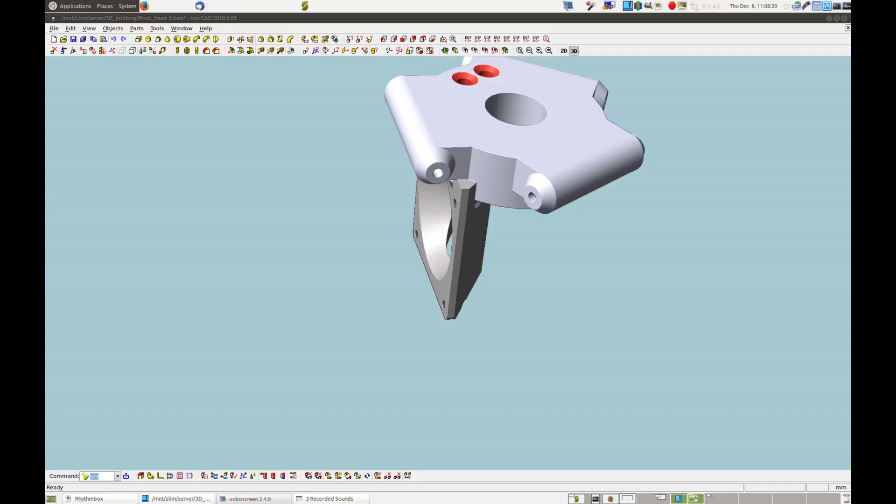Okay, well this I think will be my absolute final design. I've already got an ABS mock-up of this in the machine working currently, and the results are actually quite fantastic.

But I noticed a few little improvements I could make. Initially I had this fan area a little bit too big, and now I've got it what I think should be quite perfect. And I didn't have anywhere to tie off the wiring, so I've added these two holes here to pop a cable tie through.

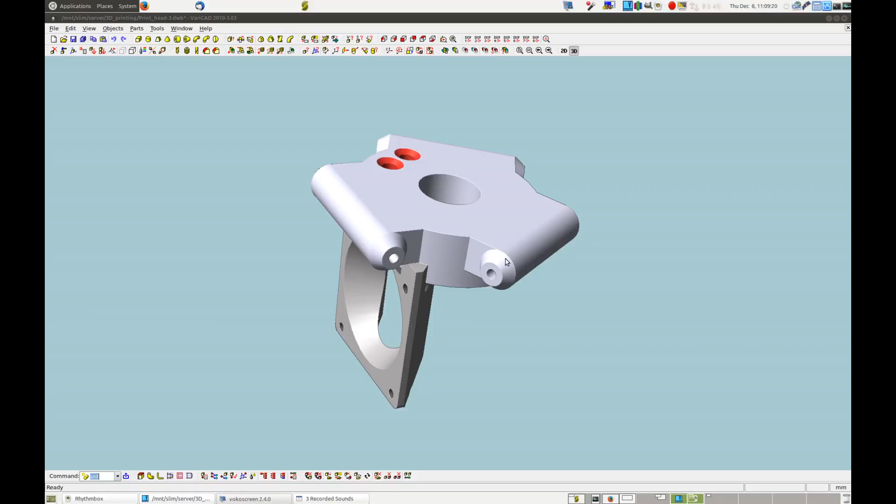These conical surfaces here are basically similar to before, and if you don't know what they're for, the ball socket joints mount and still have some operating clearance around on this beveled area. So the ball socket mounts right there on that face, and this conical area is just to allow for the knuckle that goes over it to turn freely.

The other thing I had to do slightly was change this diameter here, because the previous one was too thin a wall just there, and a few other little tweaks, but nothing huge.

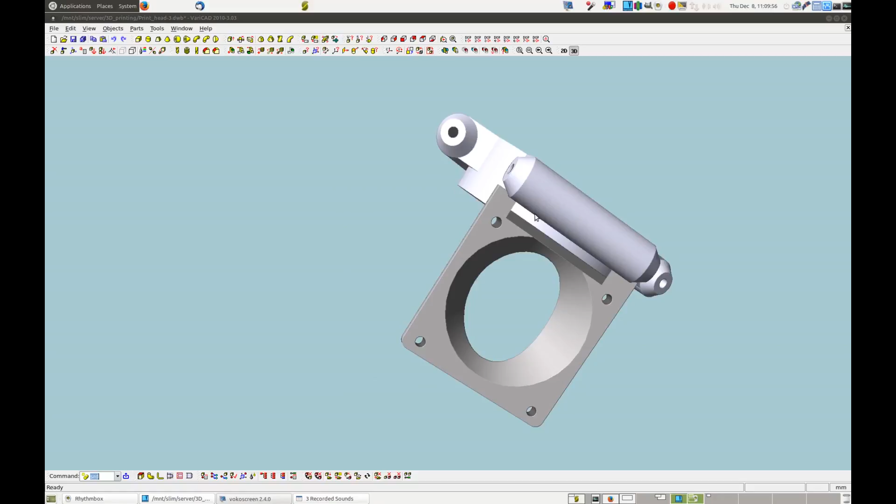But the big thing that I'm doing right now is I'm printing it out of the ABS polycarbonate filament. So the polycarbonate really adds some toughness to the whole structure of it.

Anyhow, I'll just rotate that around so you can see all the different angles. That looks pretty good.

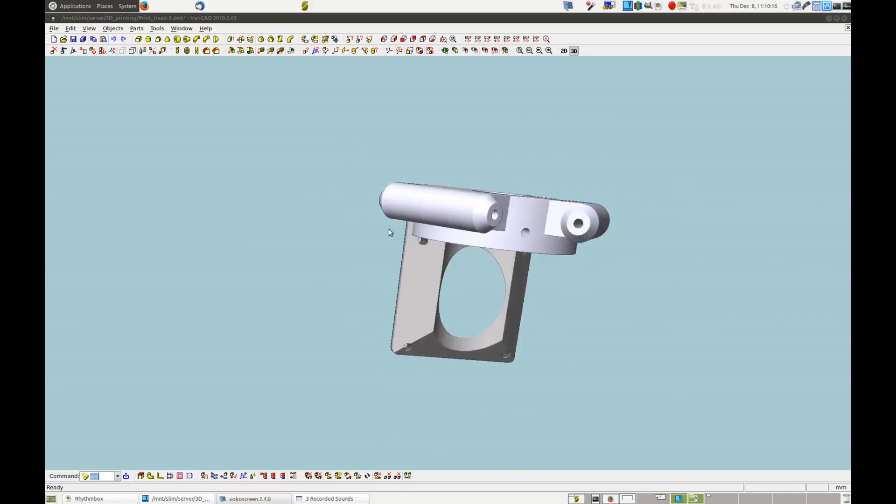Now I'll just bring up the slicer here.

Now polycarb has a lot of trouble sticking to my bed, so what I've done is put a raft layer here, because the raft layer extends beyond the surface of the print.

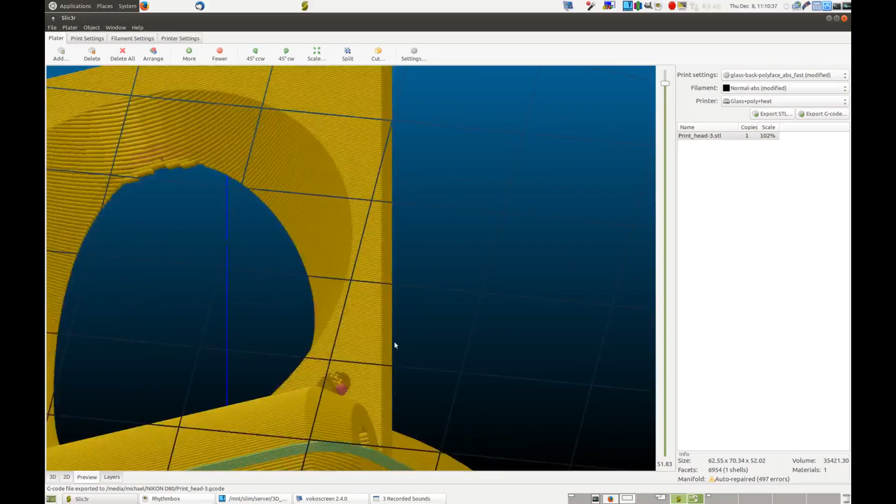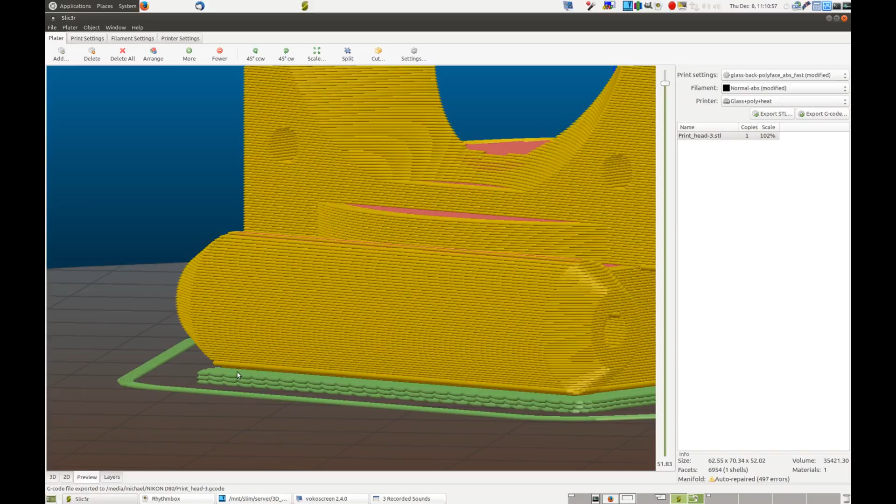Let me just get that. I'm used to my CAD system, it's a little bit different. Because it tapers out here, it's got quite an extended print area and it peels away from the base. Whereas with the raft layer, it will extend beyond the corner of the product, so hopefully it'll adhere a bit better.

Okay, so I'm going to add the part. There's this STL. The thing I keep forgetting, I'll just rotate that at -90. The thing I keep forgetting is to enlarge it at 2%. And I thought I wouldn't have to worry about it, but I do. These parts are a little bit too critical.

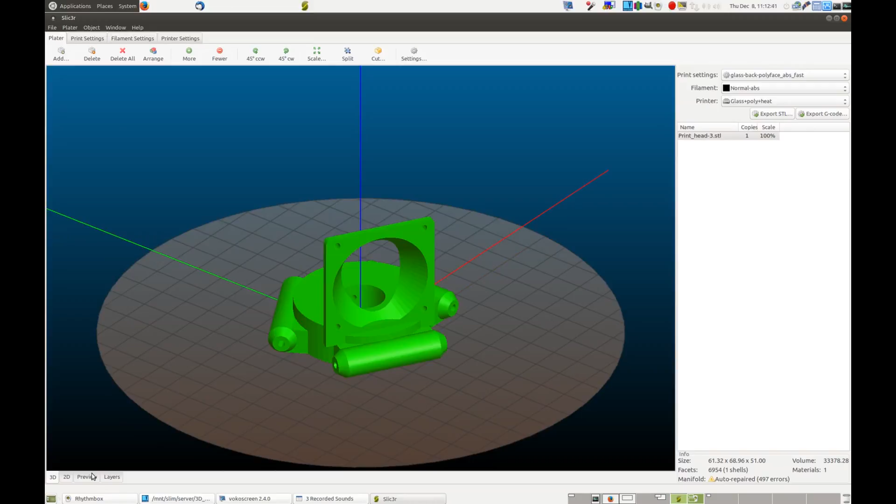Let me just see now, the plater. What's the plater set up to do? Over the preview - oh, well, it's already rendered it. One thing I like about Slic3r, it does the rendering in the background while you're doing other things.

So you can go back, change filament settings and so forth, and it immediately begins updating. Whereas I've got, what's it called, Simplify 3D.

You set all your settings and then you go, okay, now we're going to do the slicing. So Simplify 3D itself is pretty quick at the slicing of the layers, but Slic3r does it in the background, so quite often it's finished before you get there.

And I actually find Slic3r's way of slicing and constructing fill and so forth quite good. Simplify 3D has an advantage - you can specify manual supports without the default behavior of filling up the whole job with supports, or not having enough in the whole area. You can pick out a specific spot. Other than that, I much prefer Slic3r to Simplify 3D.

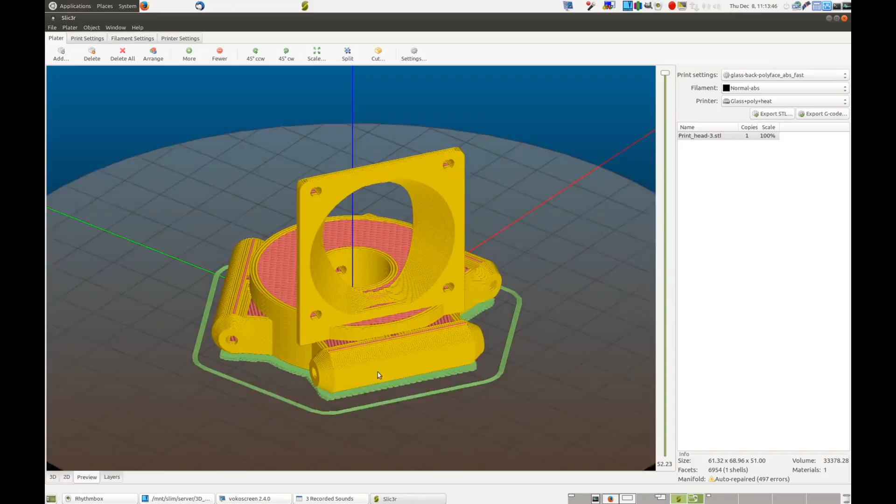Yeah, I'm finding I'm getting better results out of it, but you do have to tweak Slic3r more, I think. Simplify 3D's got very good defaults.

And the way you get to that is, where are we - preferences, you pick on the expert mode. Then you can tweak Slic3r to do some really good stuff. If you go the simple way, you have to restart it to see it.

I'll just restart so you can see that difference. Print settings - a lot of the settings are taken away from you. So if I go back and change that to expert...

Actually, if I open another instance, will that work? Well, this other instance has got the expert settings. So you can see the difference - with the expert settings you've got a lot more choices for settings. And honestly, I've been very happy with Slic3r over Simplify 3D.

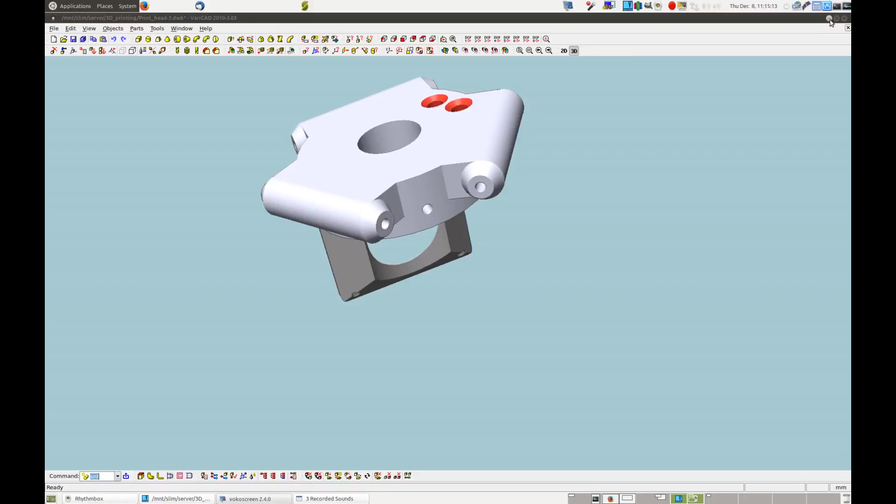I know you've seen in my other videos, I have my own little costing program that I've written. I'll just close all that - where am I? Minimize that. So there's the printhead G-code.

The way the costing works, you can see it's pretty well instantly worked out a calculation of how long it's going to take, what material it's going to use, yada yada. So that's producing the same report that Simplify 3D does, except I can just scratch around anywhere, see a G-code, click on it, and get the report right there.

So I can even leave that open and check out another one. Let's go to another location - server, 3D printing. Do I have any other G-codes around? Yeah, there's one, Printhead 3.

So I can compare the two side by side, and maybe even another one. There should be another G-code here somewhere. There we go, lock spacer. So I can have multiple reports just by clicking on any random G-code around the place.

So yeah, I've pretty much replaced that functionality from Simplify 3D with my own Python script, which I'm thinking about perfecting and then making available for sale for a few dollars.